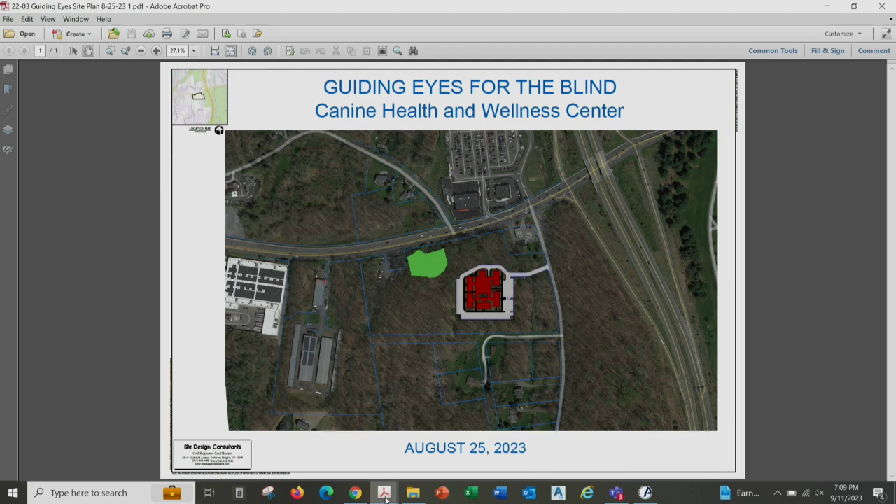Currently there's an existing residence on the site that will be demolished as part of this project. The residence has been abandoned. The site will be accessed over the existing driveway. These lighter green areas on the fringe here are local wetlands that have been delineated and surveyed.

The orange area beyond that is the buffer, so as you can see, part of the development will be in the buffer area. The proposal is to construct a kennel facility with kennel pods and veterinary facilities, as well as administrative offices. It's going to be approximately 36,000 square feet.

As you enter the site, let me go to the blow-up view. As you enter here, we're crossing an existing culvert, which we're going to replace with a larger culvert. Our proposed roadway coming in is 26 feet wide, as required by the fire department for emergency access. As part of that, we're going to be removing or disturbing some of the wetland area — it's not very much, and Tony Russo will get into that a little later.

As you come into the site, there's a loop road that takes you around the back of the building and brings you back around. It's gated at two locations, right here and right here. Visitors will be required to park in this front parking area, and the remainder of the spaces will be used for vans and staff. There are 10 pods around the building, where the kennels will be for the dogs.

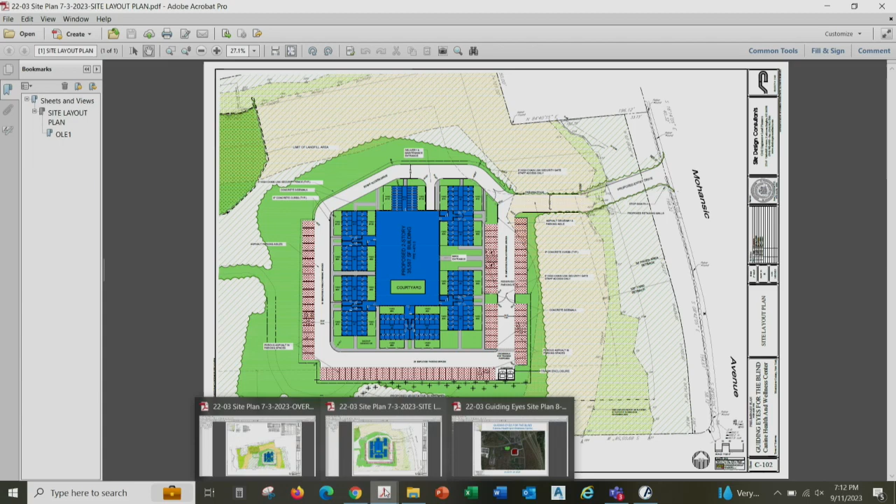As we've brought to your attention previously, this area here is a New York State DEC designated construction debris landfill. Tony will explain that a little further. As part of this project, Guiding Eyes is going to remediate that area under a permit to be issued by the DEC. So that's the extent of the project.

You want me to go in a little deeper? I can, but why don't we hit a pause, because I know we got one resident here to speak to the application. Maybe we could find out if he's got anything he wants to ask, and we could try to address that. Good idea, okay.

Please. How are you tonight? Good evening.

Darren Vajacki, 2471 Mohansic Avenue. I have some other family on the southern border in other houses, and also a property owner of some vacant land. I had some concerns to try to get a better feel of the cut line of that parcel and the buffer zone on the top of the cut. I guess Joe was trying to explain it a little bit to me as a 50-foot area before the cut goes off, as I was just explained. And then also, as you go to the southwest, we also have some property down there, and I was just trying to see what the loop around into the woods looks like.

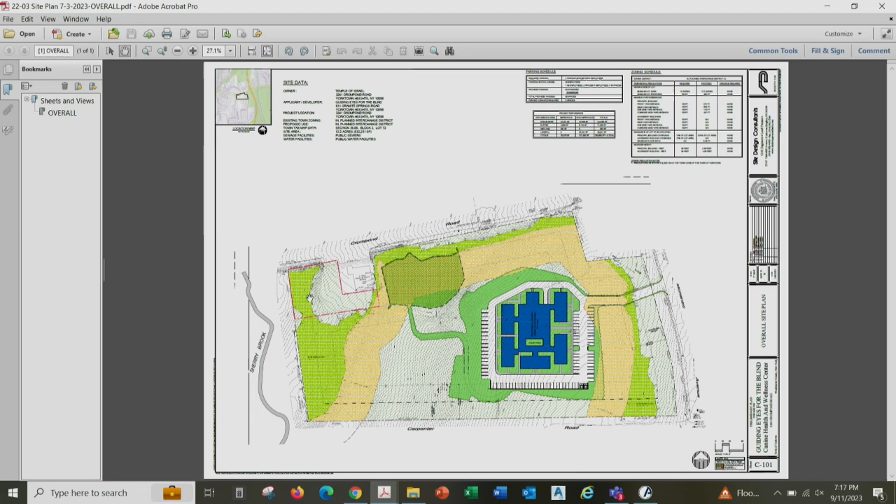As I said, this is our stormwater system right here, so you can see again that's at least 50 feet away from the property line. If I go back to this.

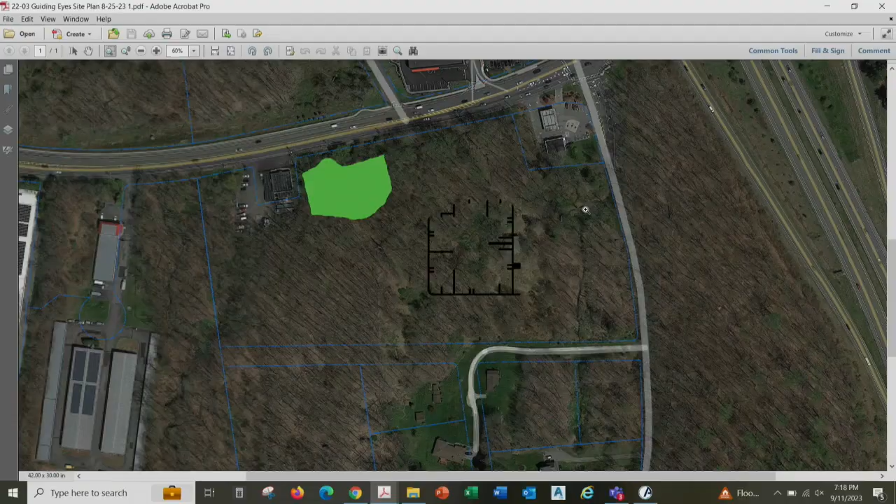So to bring it in a little tighter, that's Mr. Vijacki's house right there. This is the rear portion of his property where he said he was considering some future development. As you can see, pretty much the extent of what we're doing will reach about here.

As far as disturbance and opening up that area, we'll be maintaining the existing boundary, not to there, to about here, and we'll be maintaining a 50-foot buffer along that edge, at least a 50-foot buffer.

And the possible sewer connection down the road? Guiding Eyes is considering allowing or providing an easement, and possibly facilitating the installation of a future sewer connection through our site.

Currently, the sewer is located, when they built the Lowe's site, the sewer was brought across, and it's here. We need to extend it up the hill to about here to make a connection to it because of the stream there, and we can't get underneath the stream. So we'll be bringing our service connection in through here.

So, we're playing with the idea of maybe providing an easement and allowing a future sewer connection in that same trench.

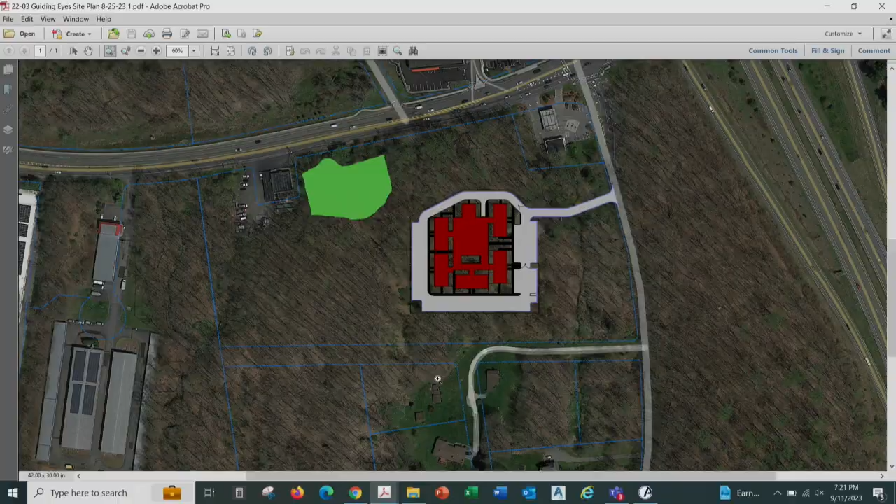So we'll be bringing our service connection and two additional service connections to tie into that new main that we're gonna install. And you're gonna terminate that at a manhole, I would assume. Right. So if there's one house, you got the shelter, and then you put another house, if you tied all those into one line, it would then be a public main.

Right, but that's what I'm saying, he can't do that, they would have to be each a separate individual easement. Right. Okay.

Anything else? Is the landscape architect here? Yes, she is. Can we, before we get to that, the noise study was done, I see one dated August 24th, and that was done at your request.

There are certain recommendations contained in there. Could you address those, and are you going to include those in the plan?

That dog didn't even bark. Is that a test, Aaron? Yes.

Our architect will address the noise question.

Do you have anything else you want to hear from me? You want me to go into in-depth on anything else? Anybody from the board have any? No. John? No. Well, I'm going to have questions on the noise in particular, but I'd like to hear. Yeah, let's hear from the architect.

But just to state that we've submitted SWPPP, all applications are in place, EAF, so we've got a complete submittal in your hands, and at this point we'll move on. I guess Phil's gonna- no, I think we're gonna go right to Paul. Okay, follow towards the- okay.

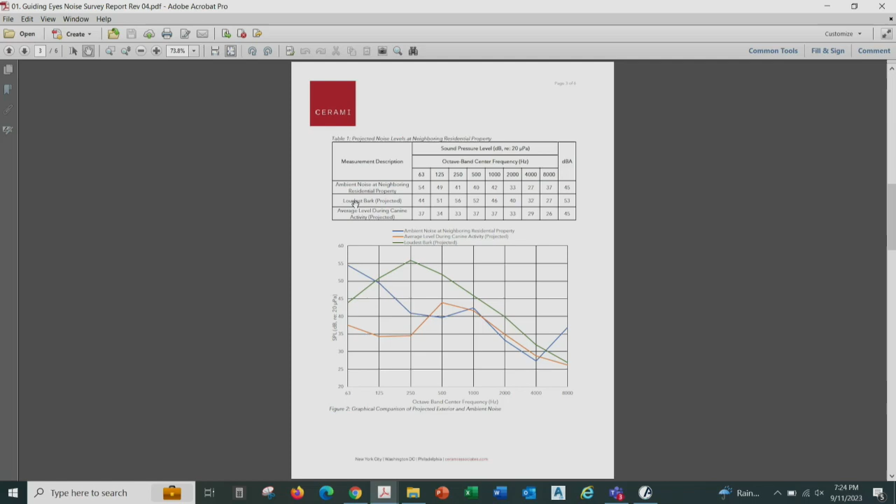In other words, the noise from our site will be quieter than the noise coming from other sources now. I'm not an acoustic expert when it comes to site acoustics - they couldn't be here today - but I can talk in more detail about what we're incorporating within the building so that you can understand the steps we're going through to mitigate those sound issues. I think that would be a good idea.

When it comes to dogs making noise, the more dogs you have together, the more noise they're going to want to make. One dog sets off and the other dogs just kind of join in. So one of the things we want to do is compartmentalize.

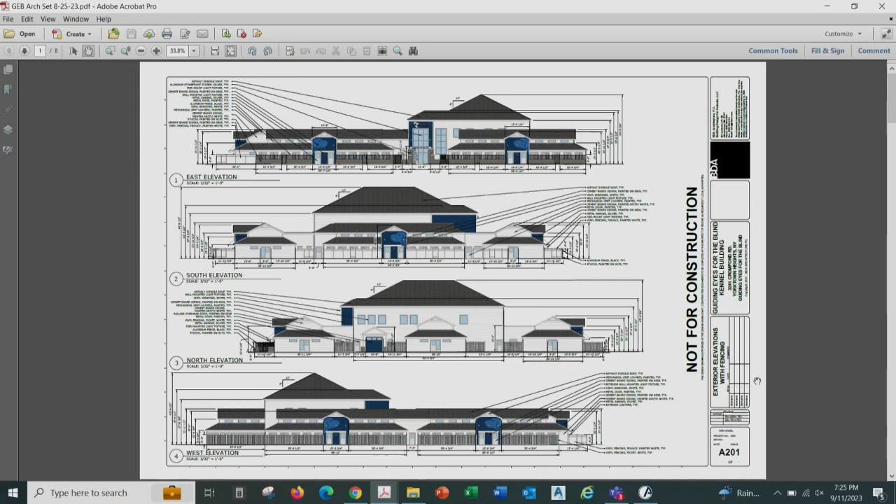Can we put the renderings up? When we were talking about these pods, that's part of that design solution. So the building is configured with a main core building that has services in it, and then perimeter pods that hold the dogs. So what we want to see is the overhead view, if you have those renderings.

Around it are these buildings that hold 2 pods each. There are 5 of those, and each pod holds a total of 10 dogs. So by compartmentalizing, you only have 10 dogs at any given time. And the way they're housed, there are only 2 dogs in a run, further compartmentalizing it.

So the most effective sound control is to reduce the source, make the source quieter. All of these things we've found are very successful in minimizing the amount of barking that's created at all. The next thing is going to be absorption.

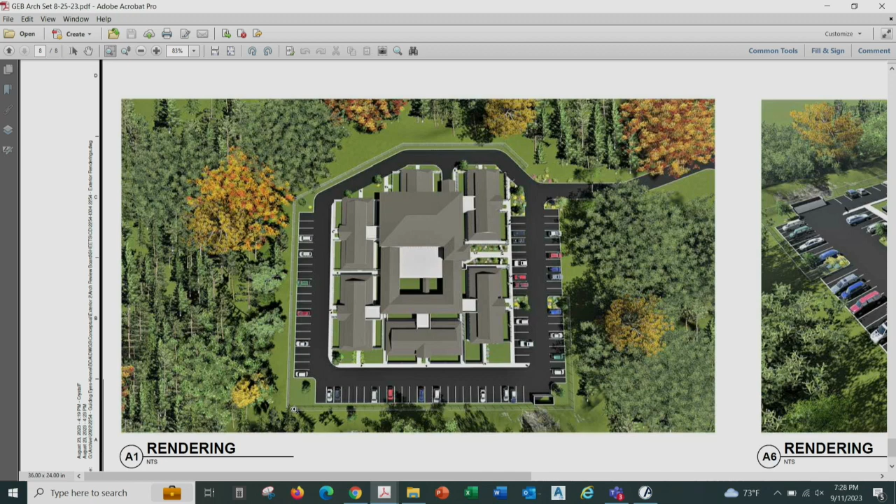The yards that they were talking about - each pod has 2 separate yards, which means you can only have 10 dogs at a time outside together. That minimizes things; right now they can have 70 or 80 dogs outside, and that's where the study measured the sound. We've reduced that down to a maximum of 10.

And on the south side, those are fully enclosed with sound-absorbing fencing - the kinds of fences you'd put around an outdoor generator to absorb the sound so it's not obtrusive. By putting in those barriers, along with the distance separation and the berm achieved by the cut, that's where the study is saying that the noise leaving our site and reaching the property line of the house will be less than the current ambient sound level.

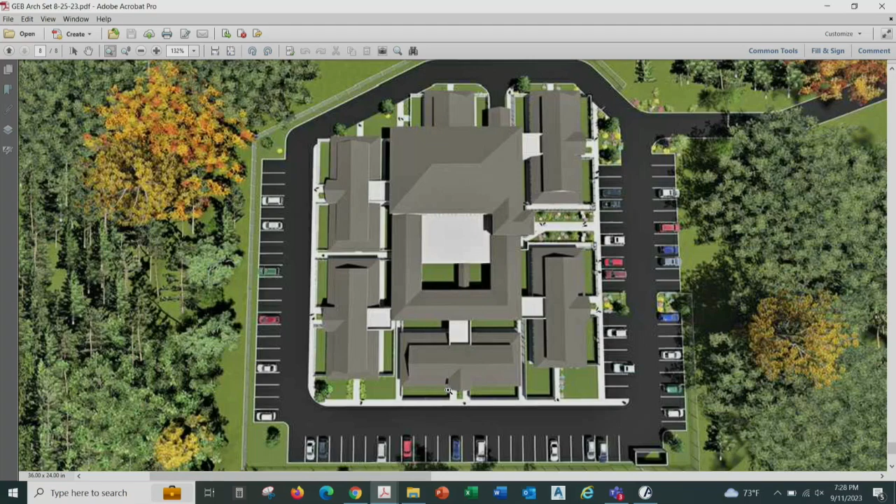So that's a long way of getting to, it's going to be a quiet site. Does that help with the explanation a little bit? And I have copies of this report. I think you guys maybe have it already.

The only question I had was if the recommendation of the report is for sound barriers along one side. Yes. I don't know if I saw it in the drawings that were submitted, whether sound barriers were baked into your design. Yes, they are. On page 4 of 6, the lines shown in red on that report are where those sound barriers are recommended to go, and those are the enclosing fences for the dog yards I mentioned, the ones with sound-absorbing characteristics. That's built into this design.

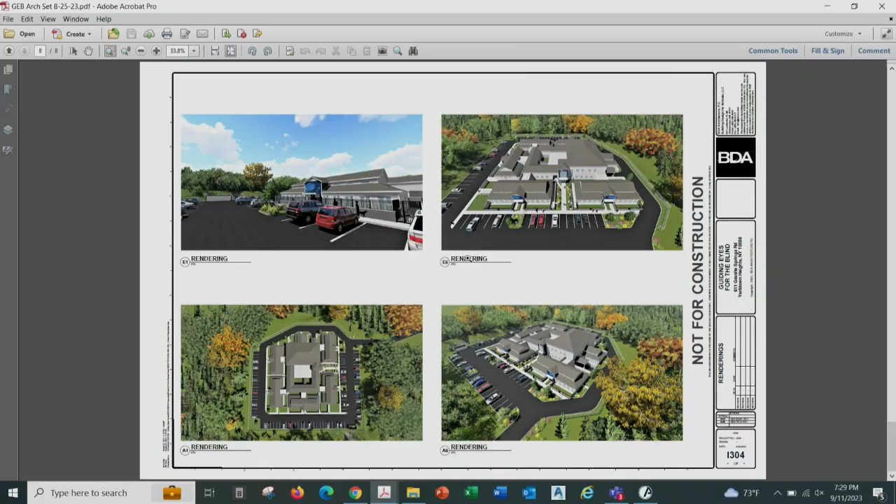Okay, I see. And we have no problem if that's an express condition. Good, that's really where I was going with it, because the dates came in pretty close - the plan set and this report were a day or two apart. I just want to make sure it gets in.

I think some greater clarity and explanation might be worthwhile here. I haven't followed it all yet, so a little more explanation would help, not right this second. From the acoustic expert or the architectural side? Or both? I think both.

John, just so we understand, and hopefully can conclude the hearing this evening, will we get something in writing from you - a memo with your questions - so they can be answered before we come back to the board for a resolution? I'm happy to do a memo. I'm also happy to have a meeting with you. That's fine as well, that's more efficient. We're happy to do both, happy to spend as much time as possible to make sure full clarity is brought to the board and everybody understands what they're going to get.

That's fine. I'd just note for the record that Zephyr is probably the quietest member of our team - that's why we brought Zephyr here this evening.

Thank you. Any other questions on the architectural side at all? Are you going to be dealing with the lighting? Site lighting, or the lighting of the building, internal or exterior? Exterior - yes, we can talk about that, it's on one of the elevations showing the style of the lighting. All of these will be cut-off type fixtures so we're not spilling light outside of our site.

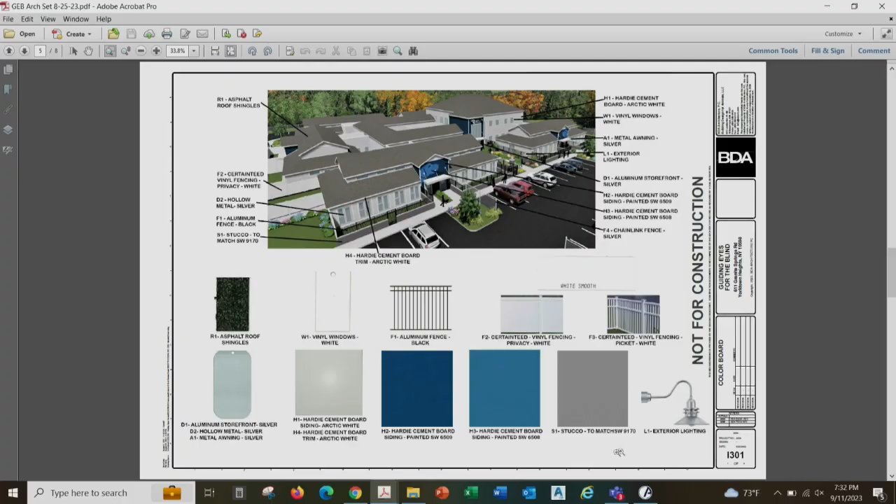If you could just go to the page that shows the materials and the fixture - in the lower right corner you can see the style of the light. These are kind of architectural style fixtures, so that's the flavor we're looking for. They'll be mounted primarily over the staff entrances and the pod entrances.

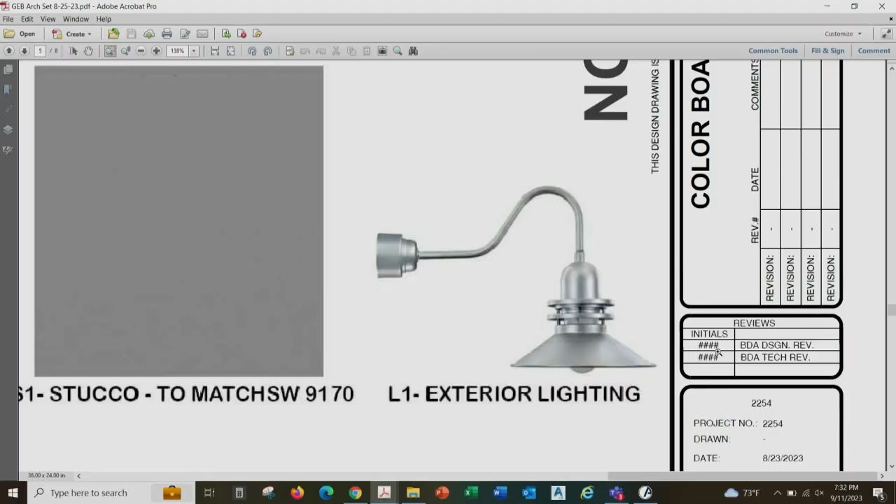Part of the training methodology is that most of the training actually happens off-site, so the dogs are loaded into vans and taken away - most of the day they're gone, not on site most of the time. So to facilitate that loading and unloading in wintertime when it gets dark early, it's going to be primarily in those areas that these lights occur. There'll be some lights at the signage mounted on the building at the front facing east toward the road, and beyond that would be the site lighting that Joe has for the parking.

So did that answer the questions as far as the building mounted lights? I think so - I don't see it in here. Did you provide the cut sheet and the lumen distribution of the fixture? Yes, we have the cut sheet.

So these are going to be the utility yard lights you're seeing right here - again, cut-off fixtures that will be specifically within those yards, so we don't want any spill leaving the yard itself, those small contained yards attached to each one of those pods.

Okay, how about in the parking area? Any of the parking areas? Joe.

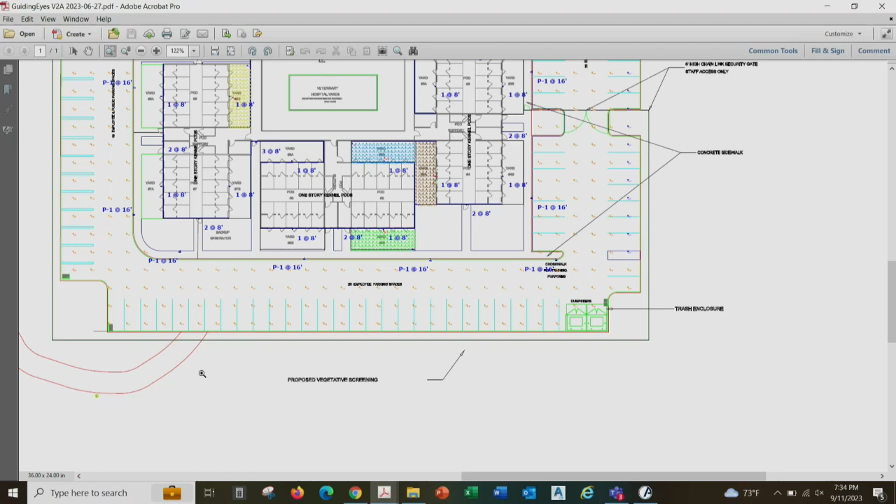As far as what's going to be occurring on the most southern edge of the parking area, the foot candles don't exceed 0.5. Once we get beyond that, we'll have 0 foot candles probably before we hit the planted buffer, so we'll be well compliant and below what's necessary to provide minimal lighting. 0.5 is pretty minimal, and it's more or less just for safety, especially during the evening hours.

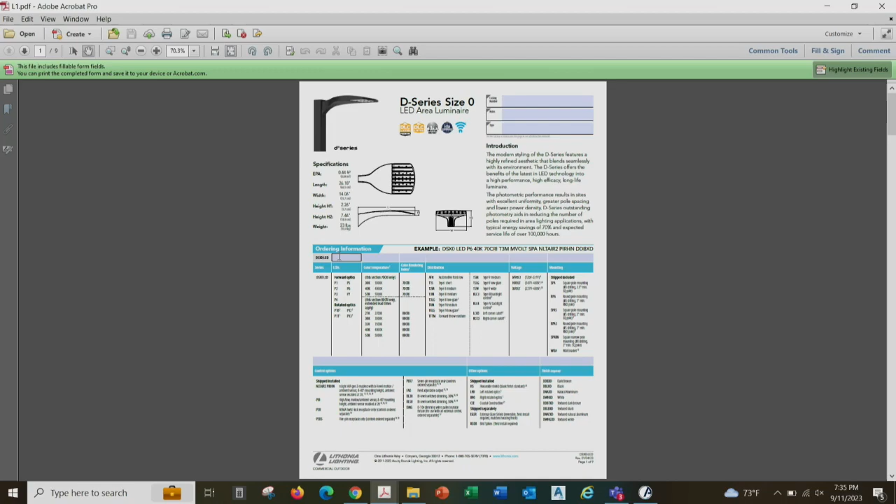You think we could see the cuts? Yeah, thank you. So it's LED, and again it's a dark-sky compliant fixture. It's not pole-mounted, not hinged at all, fixed.

No lighting? All right, do you think we could hear from the landscape architect?

Good evening, for the record my name is Abigail Adams, registered landscape architect, owner of A2 Land Consulting out of New Fairfield, Connecticut. Would you like me to run through the entire landscape plan, or just go through specific questions? I think the most important question we heard is about the screening and the buffer.

Sure, along the south side here, thank you Joe for pulling that up. We are proposing about 73 evergreens in this area. We've got a mixture of white firs, American holly, green giant arborvitae, and eastern red cedar along this area. We're going to intermix them right at the base of the cut and fill where it meets the wooded area. We'll lay those out in the field for the most ideal positioning so it works with the existing wooded area. The install height we're proposing is 7 to 8 feet for this material, with 73 evergreen trees coming along that southern border and wrapping the southwestern side.

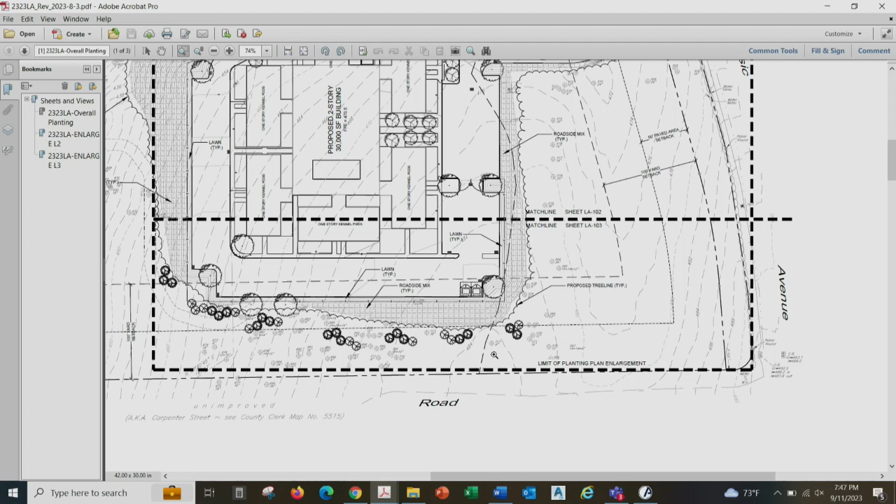Why don't we do this? And John, you can see a little bit, sorry to interrupt. No problem. But if you're going to, I would say southeast of the plantings, I think there's a dumpster area there, maybe on the lower part of the cut. Is that in the corner, Joe? So maybe it would pay to wrap the plantings a little further to the front of the building, going to the right a little bit, around the east side. Yes.

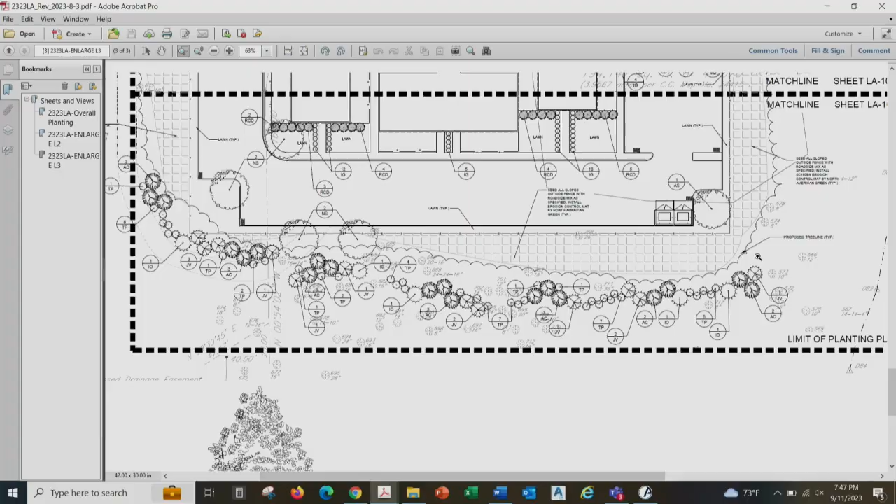And then you see how it kind of slopes off the plantings distance-wise as it goes to the southwest. So I'd like to get a little gauge on what's going on in there, with somebody a little more definitive. I think you guys aren't definitive on what's being said there, and I think it would be an improvement to be a little more clear on what we were trying to accomplish.

Why don't we do this? We're going to have work sessions after this with the applicant. Let's get, as John Tegeter suggested, a cross-section, and we'll work with them to tweak it so everybody is satisfied at the end of the day. I just think if you're going to leave 20 to 15 feet, there's no sense leaving pricker bushes at 15 feet, makes more sense putting in beautiful stuff for 25 feet. Okay, thanks, really appreciate your input. We will provide those cross-sections and come back and resolve that issue.

And we'll discuss wrapping around the additional landscaping at our future work session. Understood. Let me just check one more time, because people have come in and out. Anybody else want to speak to the application?

Guiding Eyes. Please, just come up to the mic. How are you? Good, how are you?

Good, I'm Tim Bichek, I'm the owner of Signs Inc. We're right on 202, right below, and I think everything that they're coming up with and have proposed is going to be a big benefit to what we have there now, and I look forward to having them as neighbors. Thank you for your comment.

Any comments from the board? None. John? Nothing at present. All right, so that said, we would ask, Mr. Chairman, that the board entertain closing tonight's public hearing. Do we want to leave it open for written comment, or at this point is it closed? Yeah, especially if we're going to come on for a work session. No objection to 10 days, but let's close it.

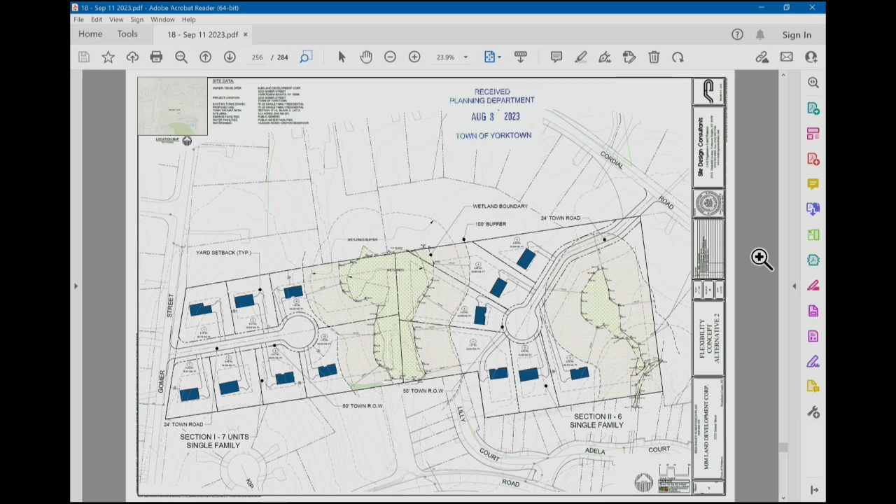Well, I don't understand that because you guys were concerned about the wetlands, and that the road from the first development to the second development couldn't go on the side closest to London Road because there was a wetland. I thought that wetlands were inviolate, you could not touch them, come hell or high water. But I came to find out through our town supervisor, when I asked about it, that it is possible to go through a small part of a wetland if somebody gives permission.

My point is, if you leave Cordial Road out of the equation, there must be a way to get from development A to development B without involving Cordial Road. That's what we're asking you to do. These people, most of my neighbors, are here tonight because of that.

We are very distressed. And again, I'm not 100% sure that you gentlemen have looked carefully at what is happening with this development. Indeed, that gentleman said he was a capitalist - I certainly am. He is entitled to do with his land what he wishes, within the law and within the zoning regulations. But we, as neighbors of that development, and as your fellow citizens, have the right to have some level of protection.

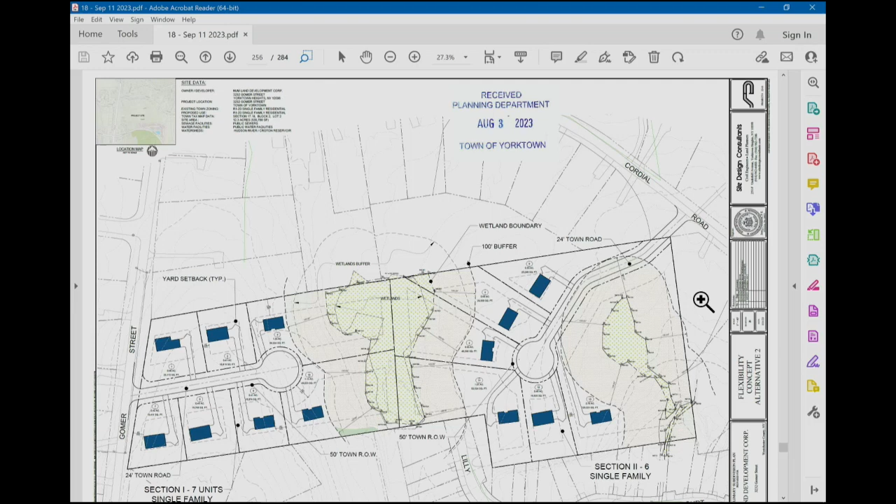So, I asked, for instance, when we did the site walkout on the property, the middle area was obviously very wet, and I think someone said when they went out there they needed boots. Absolutely correct, a very sensitive area. We walked past that, and the wetlands upward of what someone called Section B, that wetland looks like it was created from pipes in the area discharging onto the property. So, depending on the type of wetland, the vegetation, the soils, and other factors, there are determinations made. We haven't even started that at this point yet. That's something that's going to get looked at as we go through the process.

And how long will that take? The process takes a while, it's nothing that happens quickly. Well, it's done for a reason too. After tonight, once the public informational is closed, I would urge all of you to really keep on top of the project because there's a lot that goes into it. There are work sessions, where we discuss the project, but it's more of the applicant or engineer going back and forth with us, so there's really no public input there. At some point there'll be a public hearing, a meeting just like this again, where we open it up to questions when there's a more formalized plan in place. So I'd urge you to keep track of the planning department agendas and see what's involved. You could watch the meetings at home, they're all available. I find it very exciting, but there's a lot of information out there, so it's a long process involved.

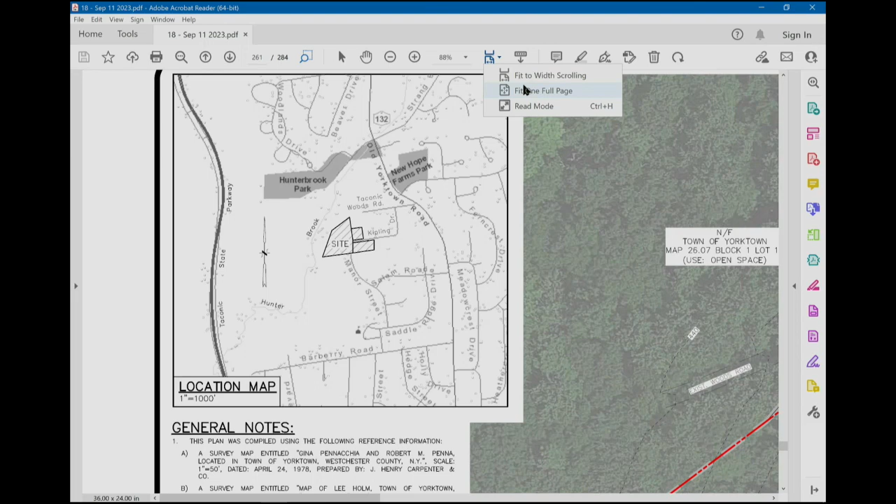So we had several iterations looking at potentially using some access from those roads, and with a lot of discussion with town staff, what we ended up with, the plan in front of you for this preliminary application, accesses all of the 10 lots from the extended Manor Street. Manor Street is currently a public road with public utilities and has the proper width as an accepted town street. So we're extending the road approximately 420 feet into the property, providing a full fire apparatus turnaround there, which there currently is not. The road ends at a straight dead end, just cut off, there's no way of really turning around.

Any large vehicle or emergency apparatus, school bus, garbage truck, whatever it might be, cannot easily turn around there and has to back down this section of Manor Street, which is dangerous. The fire code recommendation is that a fire truck can't back more than 150 feet, otherwise it's considered not safe. In this case, the fire truck could move forward, turn around, and come out going forward the entire time. Snow plows, school buses, everything would be able to do that.

Without getting too deep into the proposal right now, I wanted to go through some checkpoints. The gross land area is about 8.7 acres, more or less, and it's in the R1-20 single-family zone. The 20, as we know, is 20,000 square feet, which is a little less than an acre.

So all 10 lots range from a half acre to 0.7 acres. The largest lot on this preliminary plan is the farthest north one at the end of the cul-de-sac, that's 0.7 acres. The one next to it is 0.6, and the others are 0.5 and change, so all larger than the 20,000 square feet required.

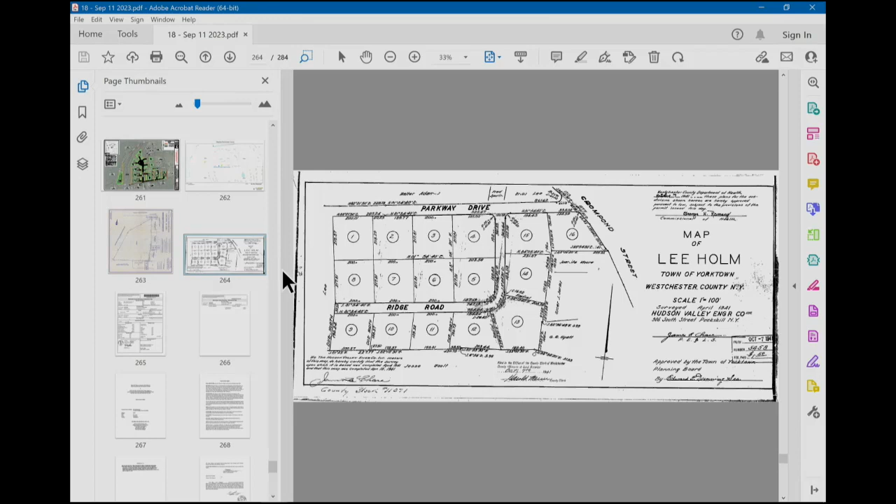This is the Lee Holm map, and I believe this was from 1941. You can see what was then called Ridge Road and Parkway Drive. Ridge Road is now Kipling Drive, and Parkway is Taconic Woods Road. This property, if you can see lots 9 and 10, those were the original 2 purchased by this owner, and then 8 to the north was later purchased, I believe a year later.

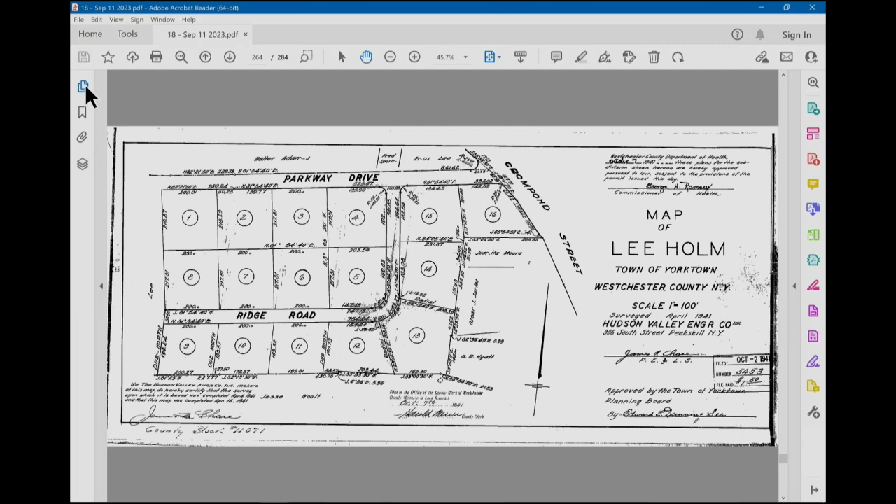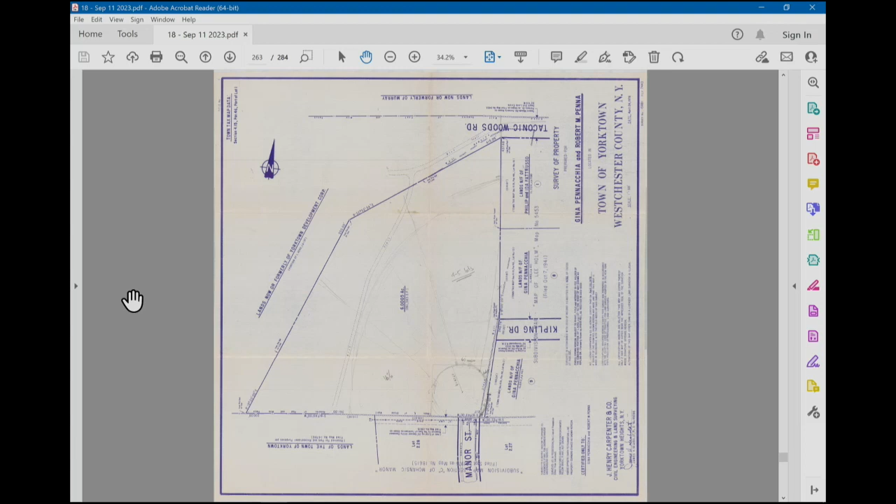So with all of that, the land is contiguous. You can see where Manor Street is on here, that would just be extended to the north, as we showed you in the concept, and then the lots cut out of that, again none less than a half acre.

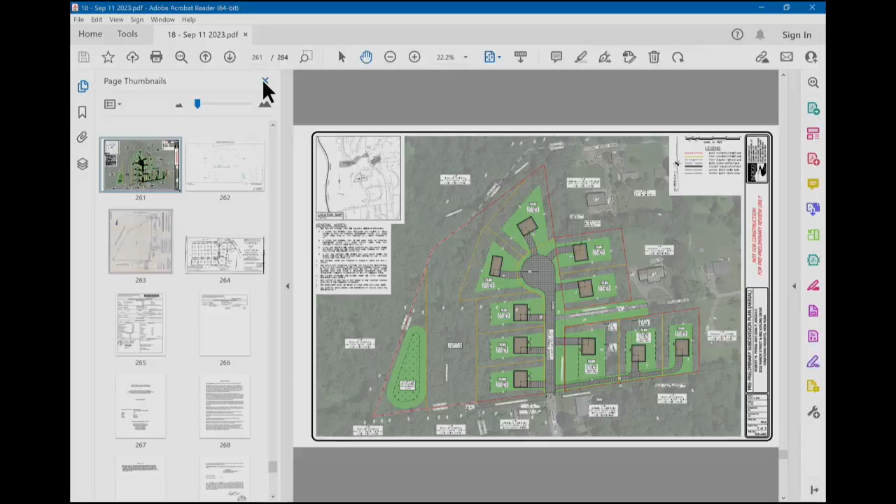There is one house on the property. If you can go back to that concept plan, please. So if you're coming up existing Manor Street, the first lot on the right has an existing house on it, right about where the cursor is. There is an existing house there. This shows a new house and a driveway.

Someone could, on that lot, it's on its own lot right now. The lot line is shifted just to provide enough acreage for the other 2 lots directly to the east of it. But that house can either be maintained as it is and renovated, or it could be taken down and a new one built in its place. But it is supported.

The area is all served by public utilities, so there's water and sewer in Manor Street, actually the water main. If Robin zooms in a little bit to the intersection of the new and the old Manor Street. Thank you, Robin. Here on the right-hand side, you can see there's an existing sanitary sewer easement from the cursor over to the east. On the left, there's a storm drain easement. And then the water line, the W dash line that goes up to the north there, goes around the existing house lots and then down Kipling Drive. There is a fire hydrant at the end of that water main as well.

So all of these lots in this pre-preliminary application would be served by public water and sewer. The topography of the land, if Robin can zoom out a couple ticks.

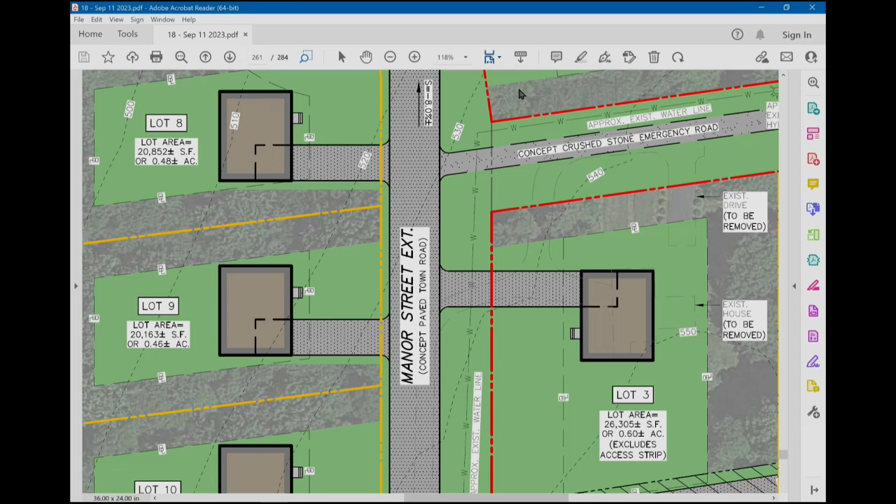The majority of the topography of the land goes from the center lot, where the existing house is, to the northwest. You can see the outer boundary of the property in red there. To the west and northwest of that is all Town of Yorktown open space. Also in the southeast, behind the lots furthest to the east, on the south side, there's additional Town of Yorktown open space. So the majority of any runoff would continue in that westerly, northwesterly direction.

There is a large open space area behind the lots to the west. That area with the green stormwater basin there, again, that's just conceptual at this point in time. But all of that land area is about 2.5 to 2.7 acres total.

So instead of trying to get more rear lots or reconfigure this to get more lots out of this, we had a couple of iterations that showed, I believe, 12 and 13 lots. But the owners did not want to do that. They wanted to keep it similar to the neighborhood around it.

If you look at the existing neighborhoods, I have a handout here as well. Consistent with the R1-20 zone, you can see that many of the lots on Taconic and Kipling, some are double lots, some are split into half-acre lots, some are combined into full-acre lots. Manor Street, as you can see on this handout I'll provide to you, they're all essentially half-acre lots as well. So in a nutshell, it's consistent with what's already there. Thank you.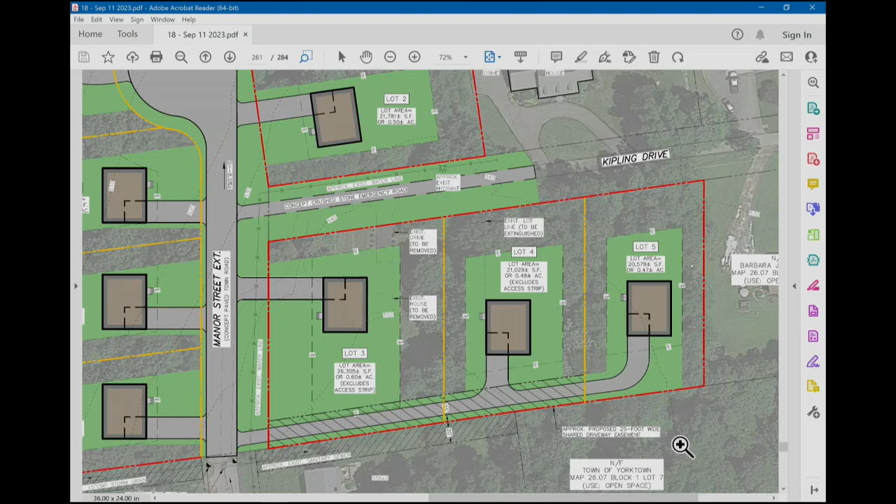Or I'll let Bob answer that. They did hire an attorney to look at ownership of that, and like I said before, it's a gray area at best. Ownership of it, but there is a road there. They actually installed a water main - you could see the W-dash line all the way up - and installed a hydrant right at the end of that as well to provide fire protection up into that area. We think that they do have vehicular rights, access rights to that road. But I think Bob worked with the attorney on that. I think he could probably fill you in better than I can.

Who don't I want to annoy? You said I didn't want to annoy somebody. Oz, he's in the room. You can't see him. We try to keep him in the room, Oz, but he's running the whole thing. Man behind the curtain. Yep.

To answer your question, sir, the original access was Kipling Drive. I think the original address was 892 Kipling Drive. So yes, our original deed to lots 9 and 10, and 8, included - I don't know if the term is easement - but we had that right.

All right, bear with me here. When I was in college, which was '73, Manor Street went only as far as the last telephone pole. Subsequent to that, it was extended, and six new lots were added. This was sometime in the late 70s or early 80s, because it was around the time I was in grad school. So at that point, my aunt - because we were coming in through the dirt road, which was virtually impassable most of the year - suddenly the town road was right here. So my aunt bought the adjacent property, the one that John showed you, that oddly shaped polygon, which allowed us to access the end of Manor Street. That's when we got the change of address to Manor Street.

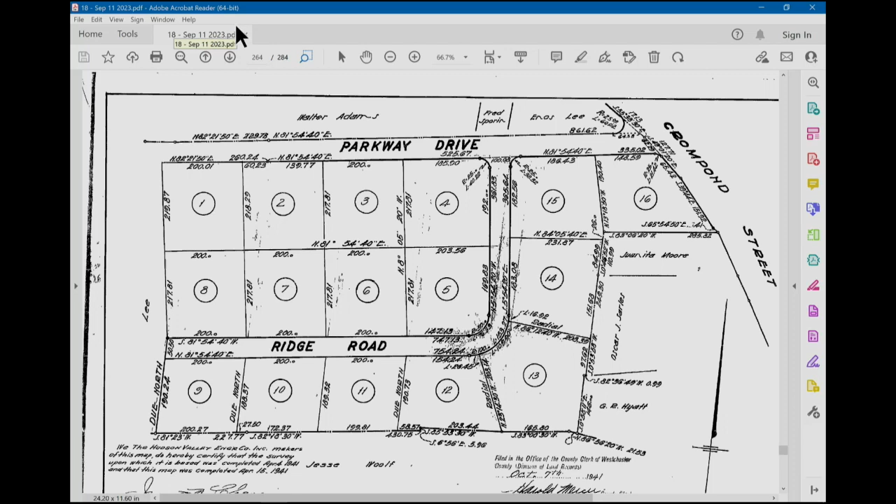There from the planning board. The access for those roads—that's why there's some argument to be made that that's real frontage, because this was an approved plat map approved by the town of Yorktown in 1941, when this property never had any access to Manor Street at all.

So lot 8 and 9 are the three that we're showing—8, 9, and 10. They control 8, 9, and 10. Okay, so 8, 9, and 10. 9 and 10 are 400 feet long along the frontage, and they have rights to access along what is shown as Ridge Road, now called Kipling.

Drive. So 9 and 10 in your proposal are now divided into 3 lots, is that accurate? 3 lots. Okay, I got you. All right, there's my confusion.

Okay, what is Parkway Drive now? That's Taconic Woods, yep. Got it, which also just sort of ends all of a sudden at the drop-off.

At one point there was a plan the town was going to build like— oh, there he is, that's Tom. Come forward. I keep forgetting the man behind the curtain.

At one point, the town, circa 1940, was considering building some sort of swimming facility. If you take Taconic Woods Road and go all the way down to the stream—I forget the name of that stream—there is a stone bridge, right where you'd now start walking onto what is the town park. There is a giant swimming hole of fieldstone built circa 1940. The idea was they were going to dam up that stream and create some kind of swimming hole, but other than frogs and snakes, it was never used.

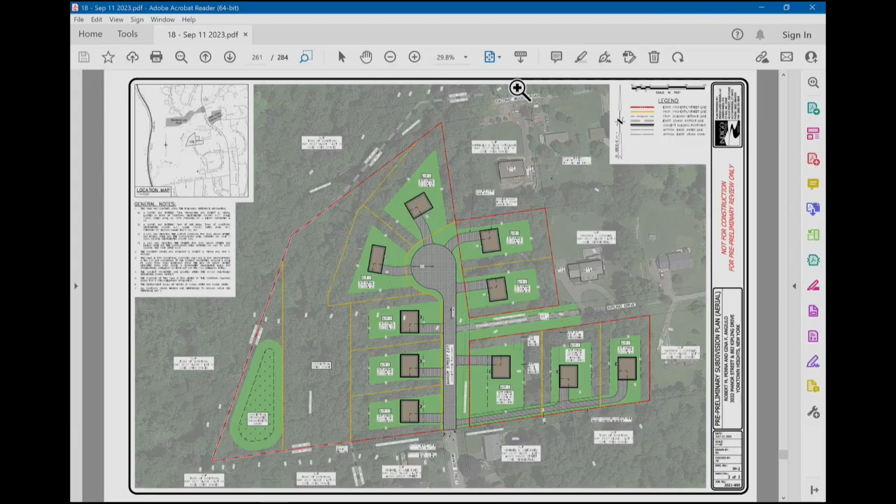So we ended up with what feels to us and to them like a comfortable layout. As we move forward, especially during public informational sessions when people can speak, it would be a good idea to lay out how we got to this point. I also think, maybe not right away but once we get some leaf fall, it would be good to do a site visit out there.

Also, you have conceptual open space—what ownership would take over that property? We had some discussion on that. It's a pretty good percent of the overall property, but overall it's a small parcel. The whole thing is 8.7 acres; with the road and lots, that's about 6 acres, so there's another 2.7 acres for stormwater and open space.

That's a buffer. This property is surrounded, as I mentioned, in three or four different locations by Town of Yorktown open space. So there was discussion of whether that open space could belong to the town, or whether it would just belong to a homeowners association that would maintain it as open space as well.

Any questions at this point? I'll tell you, very nice pre-preliminary application—thank you, very detailed, very well thought out. We were guided very well by John and Robin. They'll probably tell you we were persistent at times, but it's a good thing—we got to this point, and I think we ended up with a fairly strong and solid plan. You did your homework. We're very lucky in town to have such great professionals. But please, go ahead.